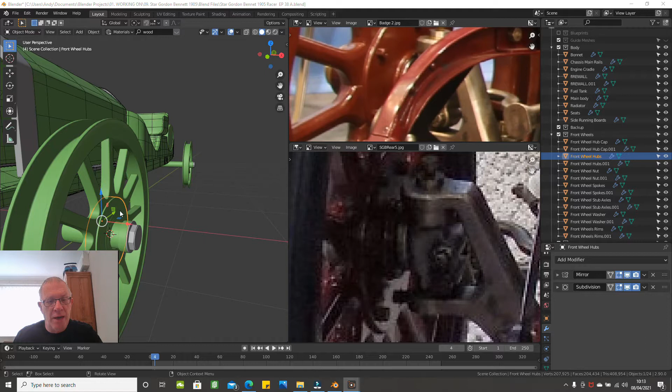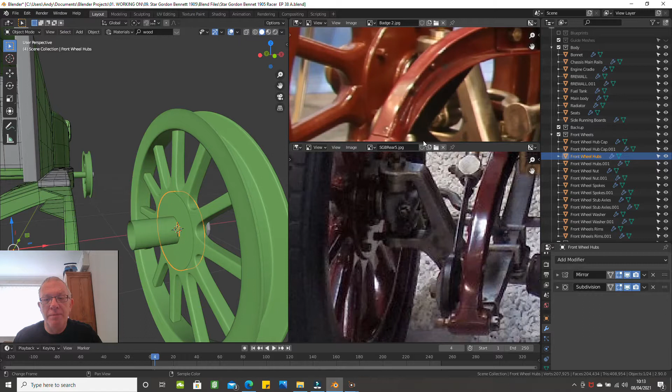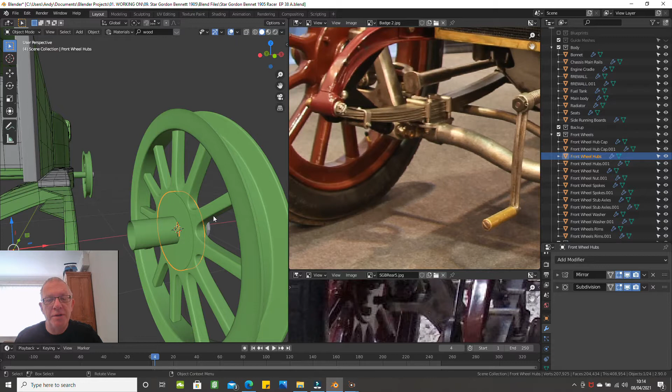In these images you can see the axle runs into a stub axle into here, and we've got this detail at the back here. Ours doesn't quite look like that yet, but it will do. In this other image, you can see this protrudes a bit more, which this doesn't, and the axle sits a little bit lower, so I'm not quite sure how it's connected to that stub axle there. So what we'll do initially is run this axle to here, and then when we do the stub axle we can lower it into its proper position. Anyway, let's get into it.

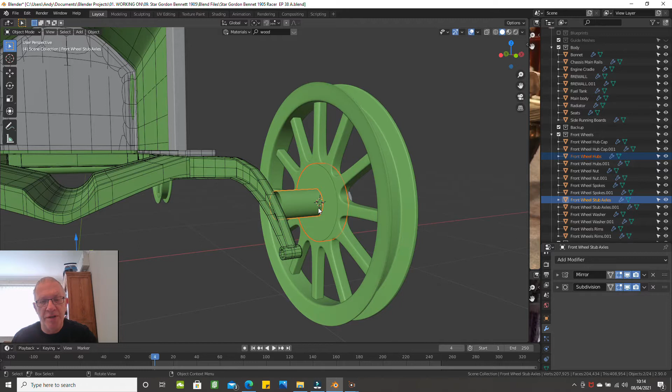For this I only need this part that I've highlighted plus the stub axle part. Let's have a look. Yeah, that's all we need. So select those two, press the slash key and go into local view. Let's disable the mirror and the subdivision surface for that, and also for that. So we've got two objects.

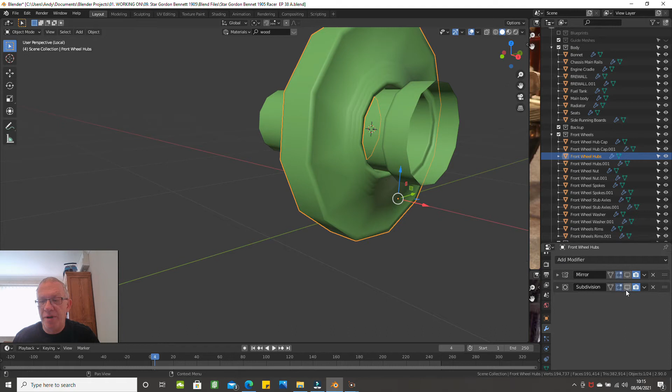The first thing to do is, actually I'll put the subsurf on for this. So first thing we want to do is make this a gap, so what we'll do is increase the diameter. We'll see it better at the back.

Going to select this and put the subdivision back on. Go into this, select it, press tab to go into edit mode, and press S. Let's just scale it up a bit to about there. That looks about right. Okay, so that's that.

The next bit is to press tab and go into object mode, choose this object. We need more definition, it's still not quite right. That's still not quite right at the front here. So let's go back into this.

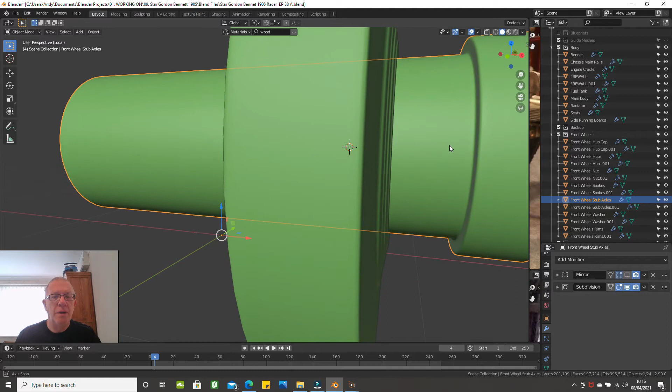Let's go back a few stages. If we go back a few stages to there, I think that's where we were originally. Right, okay, yeah, so tab to go into edit mode.

Press 1 on the numpad. We only want to select this, so B for box select, Z to go into wireframe. Let's select this for a start up to here, and then zoom in, and we want, let's have a look, so press Alt and Shift and highlight that, and Alt and Shift and highlight that.

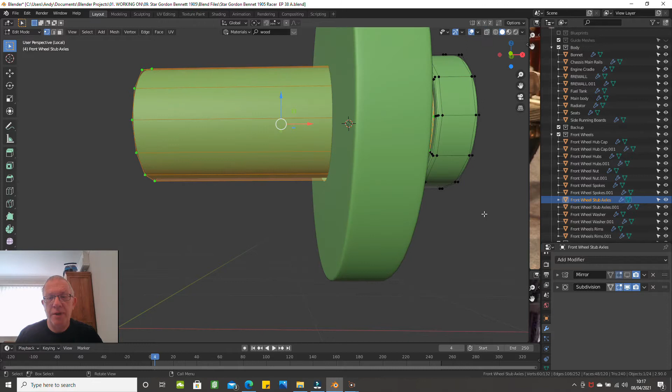Now we need to scale it up, but we need to scale it up in bounding box, so click on this and click on bounding box and scale. Press Z, go into solid mode. Let's have a look where we are.

Okay, so we get in there. Just a bit more now, so scale and bring it up to about there. That looks like a tighter fit now. Press tab.

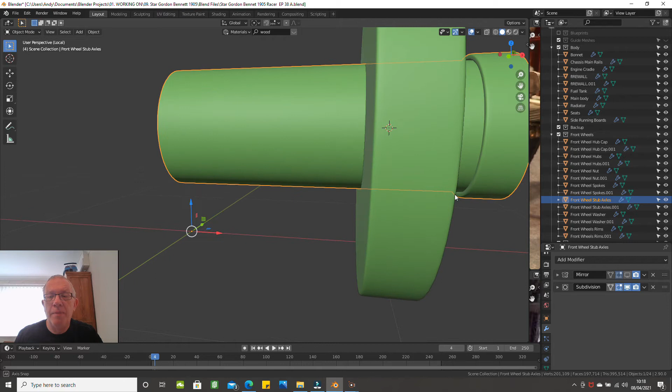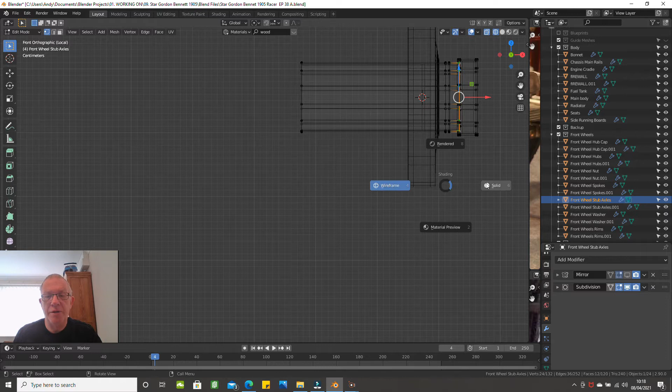Now press 1, Z for wireframe. Now let's disable that, because what we've done here is scaled it in. So let's move all this back to there. Press Z, solid. Let's have a look, see where we are now. Yeah, so that's better, that's better.

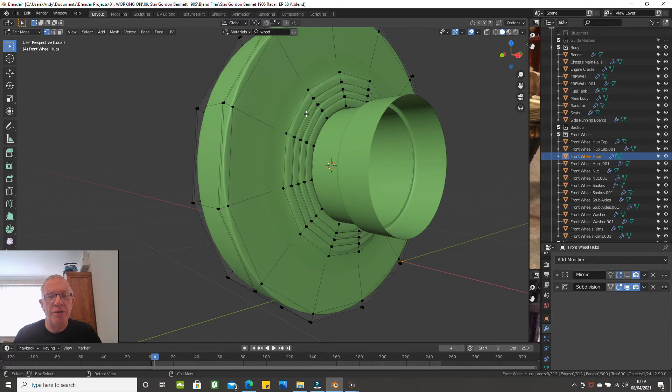Okay, so we've done that. Now what we need to do next is put more definition in this. So if you highlight that, press Control R, and what we're going to do is put a series of loop cuts in here. We need much sharper edges there basically. So one there, one there.

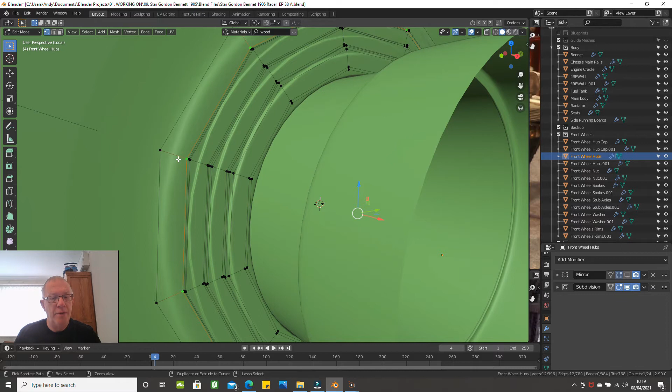That's fairly tight there, so we need another one here, drag it across here. Just keep moving up the line until we've got sharper definition on all those extrusions. We need one here, so here, tight up to there, there, tight up to there. Okay, press tab, that looks a lot better.

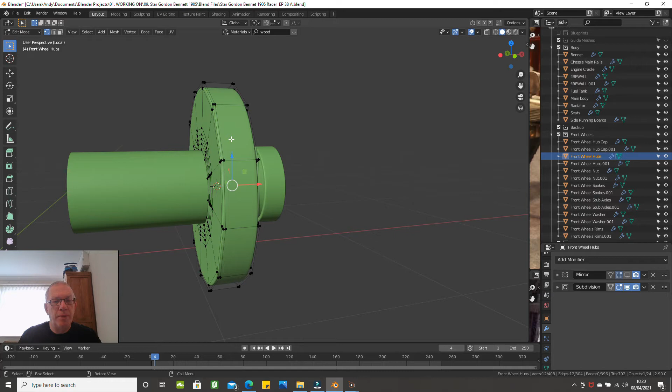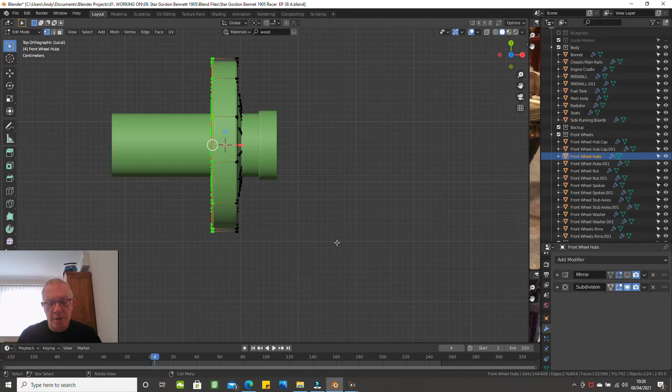Okay, so this one now, this one again, and we just need to highlight this. So go click out and make sure nothing's selected. Go Z, wireframe, choose this outer edge, so box select, middle left mouse. So box select is B. Select that. Go back into solid mode. Press slash to go back into global view.

And what we're going to do is bring these out a bit to get that detail at the back. Press tab. Yeah, that looks a lot better. Okay, so now we'll choose the stub axle and press tab to go into edit mode.

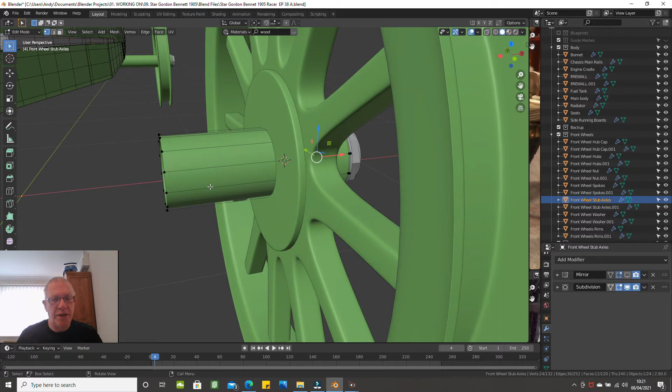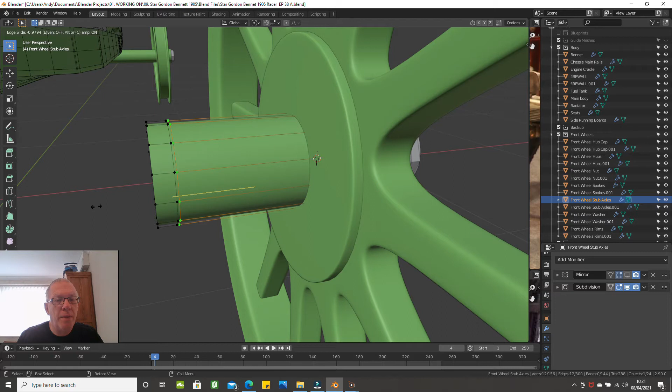Put a loop cut, drag it to around about there, put another loop cut in fairly close to it, so bring it as close as you can without merging. So to there. What we need to do now is grab these two edge loops.

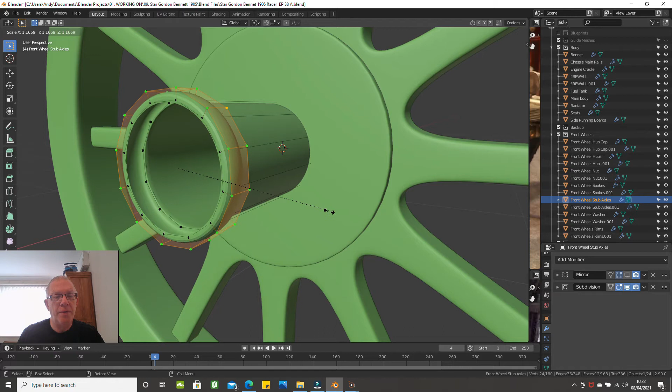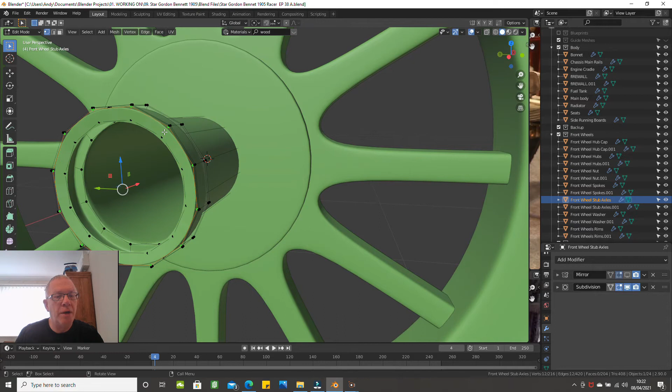Okay. And what we're going to do is extrude and scale outwards. So once again, make sure you're in bounding box. So E, S and drag it out to about there. Put some loop cuts in here, drag it towards the end, here, and drag it towards the end, and likewise on the end face, there and there.

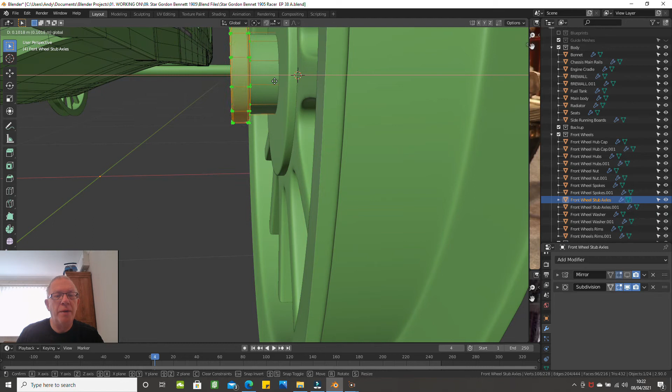And now we need to position that so it's sitting on there. So what I'm going to do is press Z, go into wireframe, and press B, box select, select all these, Z, go back into solid, and then just drag these back. So zoom in, drag it back so it just starts to intersect.

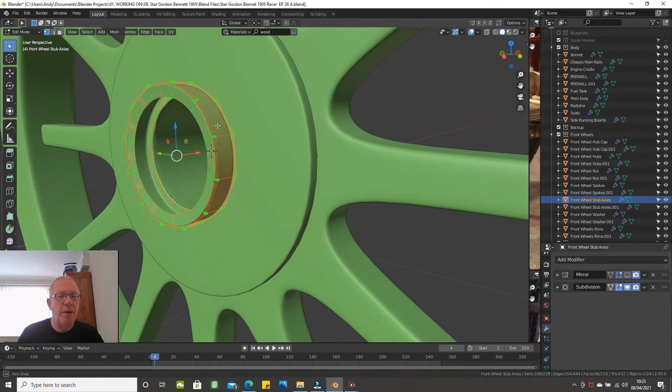Yeah, that's pretty good. Right, so now to get the axle, press tab to go into edit mode, pick the innermost edge. So let's go to Z wireframe. Right, we need to pick this innermost edge here. So Alt, left mouse click, choose that. Okay, go into front view.

And right, go into tab again. We only need this bit. So where are we? I'm trying to find it now. Oh, I'm at the back. Okay. So tab, press forward slash. So we got this. Tab to go into edit mode. Tilt it a little bit. Make sure you get that innermost edge here, because that's what we're going to extrude to be the axle.

Press 1 to go into front view. Make sure that the mirror is enabled and that you've enabled clipping. So if you haven't enabled clipping, tick the little box here, and what we're going to do is extrude it all the way to the middle. So E and X, and extrude it all the way to the middle until it locks. Z solid. So there we are, we've got that. So forward slash to bring everything back, go into front view again.

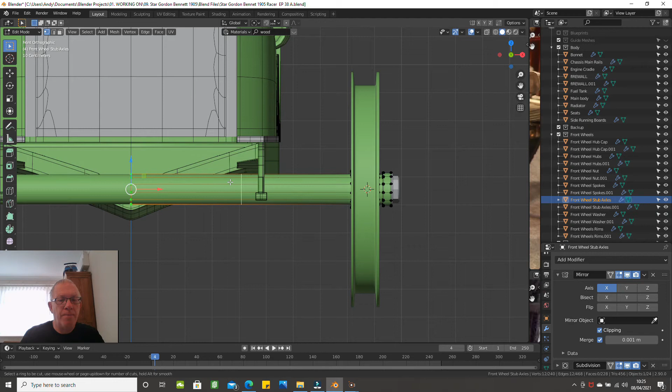Now I'm going to put a loop cut in here. Roughly there. What I'm going to do now is press Ctrl and B to bevel it. So I'm going to bevel it to about there. Oh, let's go back. Ctrl Z. Right. Ctrl B. Bevel it to here. And before you click anything, scroll up on your mouse, and that puts a segment in. Okay. And then left mouse click.

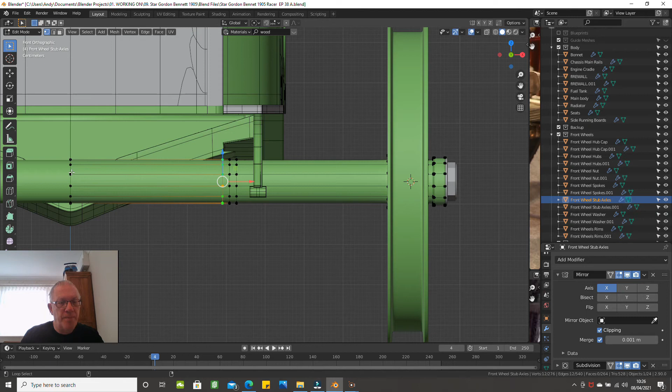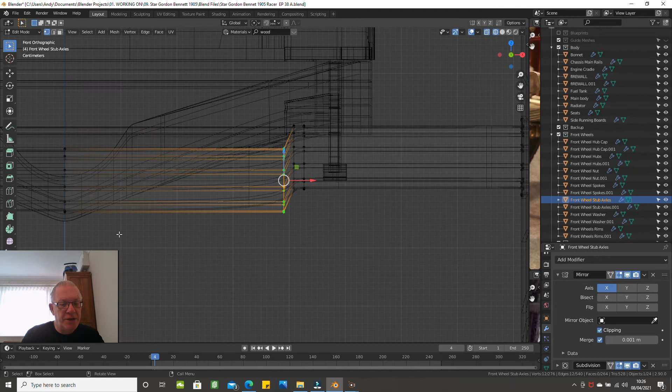Okay. Choose this outermost edge, this innermost edge, and this one, and bring it down. Deselect this one. So go into wireframe, make sure that everything's deselected on here. Z solid, and just pull this out a bit to here. Grab this one, pull this back to about here.

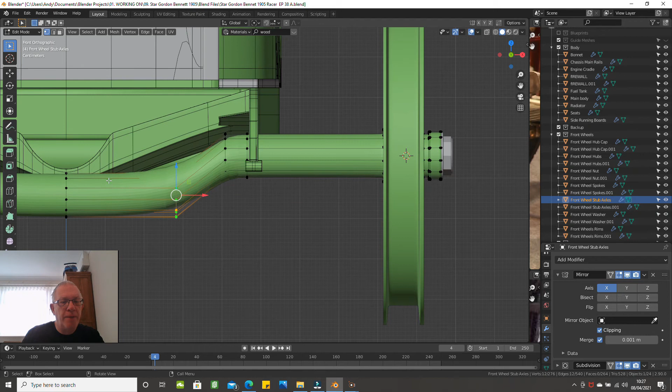Now choose this one and this one. Let's pull it down some more. Grab this one, that edge loop there, and bring it in. So we're gradually getting that shape now. So now this one, just highlight this, pull this down some more so it's a curve. Press tab. There we've got our axle. We don't need any sharp edges in it or anything like that. So there we are.

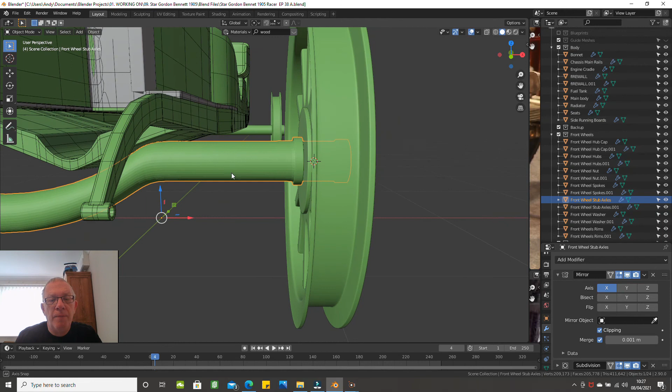Okay, so before we do anything else, we'll go into Object and Shade Smooth. Now we need to make sure that all our objects have the origin in the world center. So what I'm going to do is call out the front wheel axle, go into the outliner over here, rename it. It won't let me rename it for some reason.

Okay, so what we need to do is go to there, go to set origin, origin to 3D cursor, go back, Control A, location, Control A, rotation. They're the ones that I usually use, and then hide it, and then go to each of these in line and make sure that you've done the same. So just to make sure that we know what we're doing, go to object, set origin, origin to 3D cursor, then press Control A, apply location, Control A again, apply rotation.